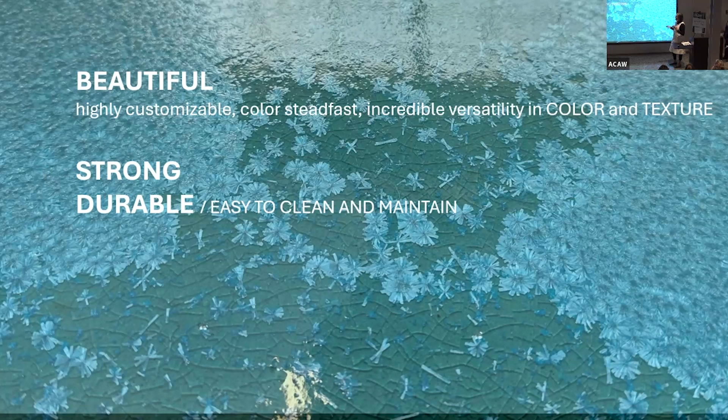One of the things that we loved about terracotta was that it offered us the ability to play with color, which is something that in our market is highly desirable, but that it's also strong and durable and easy to clean and maintain.

I want to pause about design and beauty for a second, because we were walking with Omar through this amazing tour, and we got to see the Guaranty Building.

We talked with Mick also about how long a building should last. In our experience, if we're trying to convince somebody to spend money on a facade that's out of the norm of what they normally do, if it's not concrete, stucco, steel and metals, which is commonly used, we really have to do something that they consider beautiful. And when it is beautiful, you can see that it does last because people take care of it. I thought this was a really beautiful quote: in the end, we conserve what we love.

The idea that you're going to just be economical about something, or functional or rational, without thinking about the beauty—I think sometimes designers feel uncomfortable with that word, but in fact it is what keeps people wanting to invest in your project and to use a material like terracotta, because they really just fall in love with it. We couldn't get enough of this building.

We have seen people fondle our terracotta. We ourselves can't stop touching it and looking at the glaze. We think there's a real human need for that in our built environment, aside from all the other important things that all of the teams have touched upon—this need for connection and beauty.

So I feel sorry for this generation, but we think our generation needs to be about the solutions. When I graduated, our region was hit by Hurricane Andrew, and what we witnessed after that was that our wind zones have gone through the charts. We started at about 120 miles per hour, and now we're at 150, 180 mile an hour winds. We're in what you would consider a high velocity wind zone.

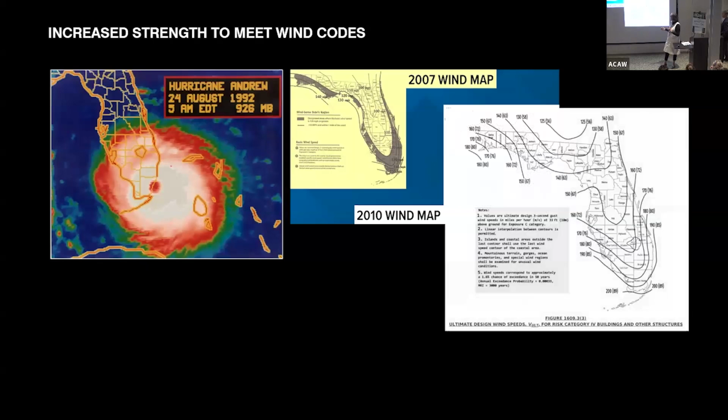And this is where we are right now: we only have maybe two tiles that we can specify that are concrete. What we're witnessing in the market is that facades are delaminating, so mortar beds are not holding up. We're getting what used to be 100-year, 500-year storms—that doesn't mean anything anymore. And when you couple it with wind, it's really an issue.

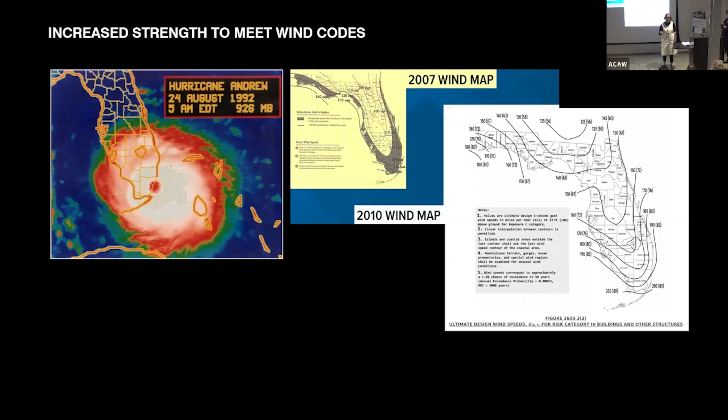It used to be that we would mud-set stone facades. Now we almost always mechanically fasten—it's now the code requirement that you mechanically fasten. So we were really pleased that Boston Valley Terra Cotta has a system that already has an NOA, because otherwise, if you have to tell a client 'I have this material you've really never used before, and you're going to have to engineer it and get it tested,' that becomes just another barrier to using it.

We talked about water. We feel like there's an open question about whether or not people should even build near the water, and I'm not going to get into that. All I'll say is my people have been in the region since the 1600s, in Cuba and that area. And if we cannot, with our ingenuity, our innovation, and our resources, come up with solutions, then what hope is there for the whole region? Not everyone has the resources to move.

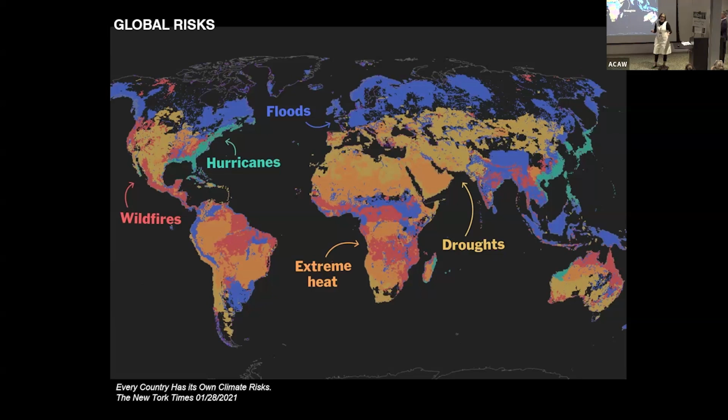If you look at that map I showed you—this little graphic the New York Times did—I think the whole world is under threat. Our little corner of the world has hurricanes, and we've got extreme heat everywhere, and flooding. But I think the world is going to start looking a lot more like Miami, where we have to deal with extreme heat, humidity, rain, and flooding. So we have to engage with that reality. And the other part of this water issue is that it's coming from the ground for us, because our ground is porous.

So in looking at historic buildings that were using terracotta and materials like that in the 20s, it's interesting to see that the reason the base of buildings were made of materials that could be easily wiped and cleaned is because when you have flooding, you don't want things to grow on that facade. You want to be able to clean them off and hose them off, because the stuff that comes with flooding is not nice—it's really a toxic brew and stew.

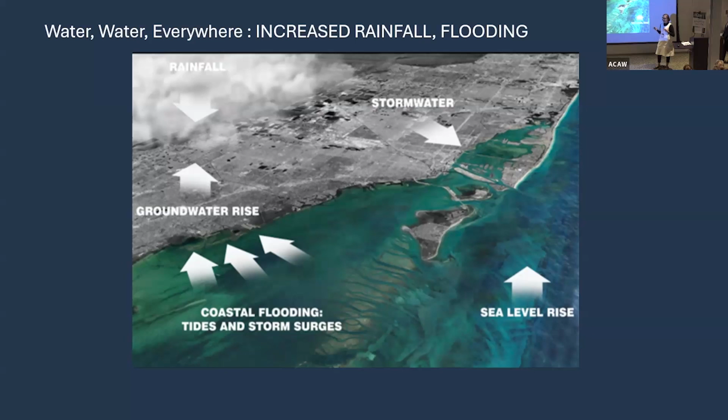So we're looking at materials. When we say durable, we don't just mean that they can stand with wind and extreme heat, but that if the water rises—and it will rise—what's left behind, we can clean it off and continue occupying these buildings. That's kind of the brief, and that's why we were interested in terracotta. We think it has a lot of the qualities that we need without the carbon.

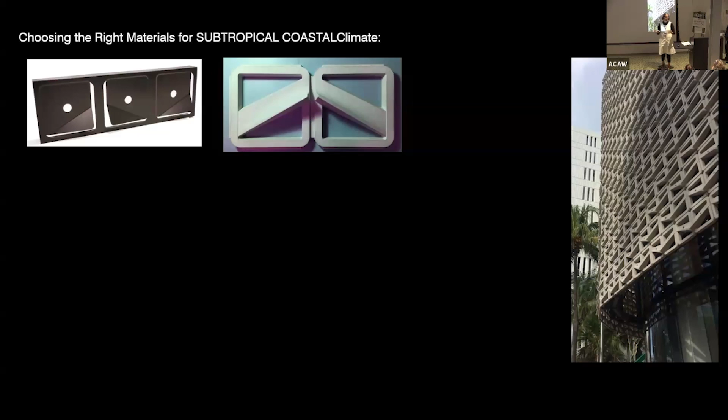This is an example of a project where we were playing around with fiber reinforced concrete. One reason we tried to get this client, in partnership with us, to change from a dark metal skin is that in our climate, keeping it light, as you guys have heard over and over again, is super important. Keeping it non-porous is also important. So this fiber reinforced concrete was interesting.

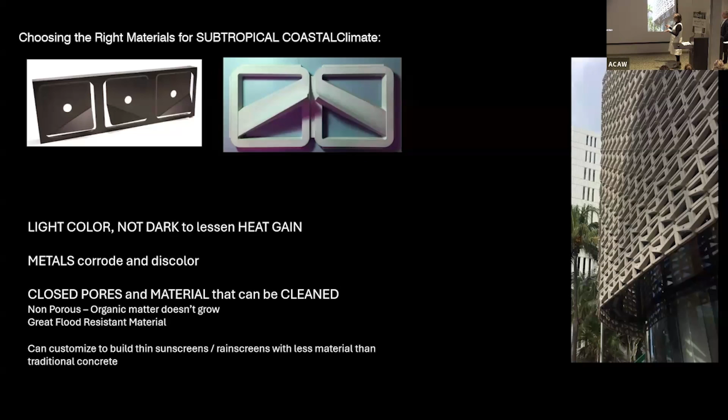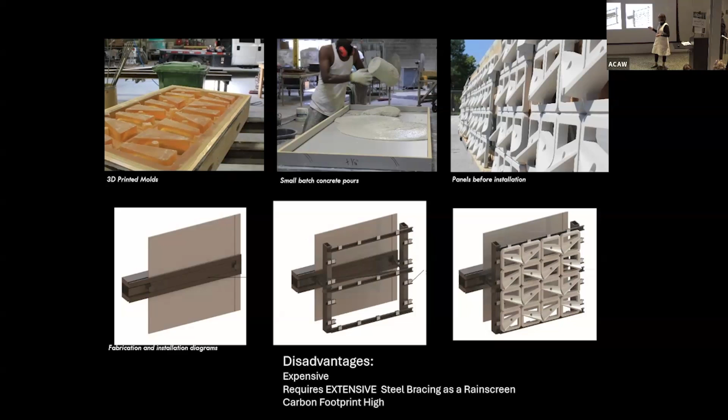We're finding that metals discolor a great deal. It's not great to have a lot of metal in our buildings in our region. This had a lot of positives, but the negative we found was that even though we were able to reduce the amount of material by using fiber reinforced concrete, what we ended up with, due to our wind codes, was a giant metal armature. So if we're being honest with each other, I don't need to do a life cycle analysis to know that's not necessarily a carbon-friendly situation.

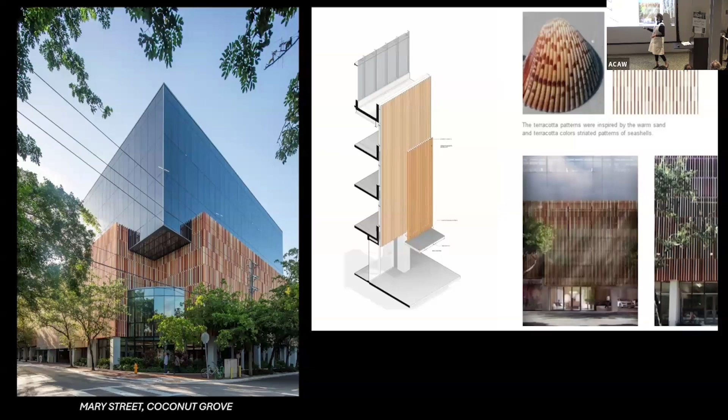It was a really good and instructive lesson for us. It was almost value-engineered out, but we managed to keep it by spacing it out, using less of the material, and using a consistent palette.

In this case, again, we were trying to always look at Florida-friendly or Florida-inspired materials. We were looking at seashells because there was a question of whether this would be embraced by the community—would they feel terracotta is an appropriate skin? We had a brick building in our foreground, and the name of the client was actually Terra, so we felt like terracotta was a good bet.

We were able to get it in, and it was well received, and it did install beautifully. They will not have to paint it, and it will not discolor. This isn't Boston Valley, but we didn't know you guys then—I apologize, but I wanted to show it. It did win awards, and it is on the cover this month of Florida Architecture magazine.

So I do think there is a possibility of using more of it, and we just have to figure out how to make it such that it doesn't get cut because of budget.

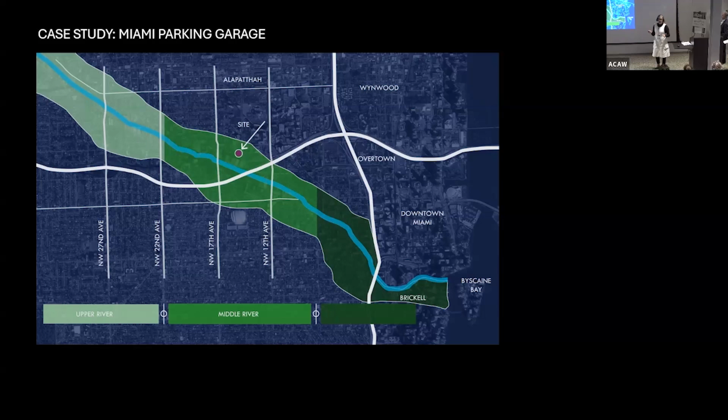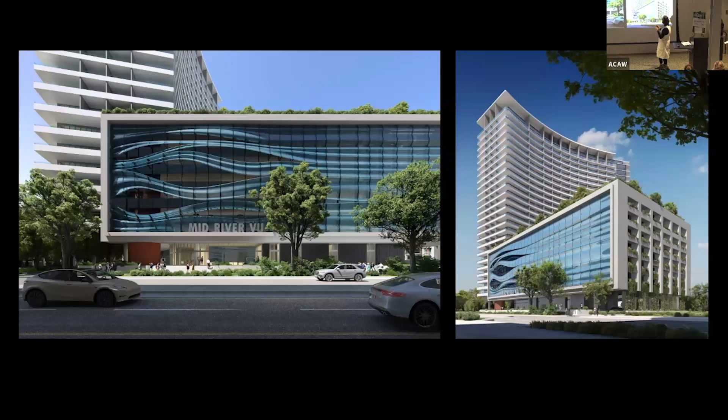So this project was the one we chose to study. It's again a parking garage structure on the river, and the inspiration for what we call the water wall—although we also workshopped 'blue wave,' but no, that has political meaning. There used to be a river in Miami with rapids, and that is no longer the case; it's gotten much more built up and so on. But there was this memory, and our site is on this river. So we designed a building that we presented to the city and have approval on.

One of the things about new buildings and new construction in Miami is that any new building has to take care of its water on site. I think the group from New Orleans talked about that. So when you have all this new construction next to lower density buildings, you have to take the water from the roofs, somehow deal with it, hold it, and release it slowly so you don't flood the properties next to you.

So the facade that we were looking at was this one, where we would take the runoff from the roof, slow it down, and then bring it into cisterns and into a rain garden at the base of it. This facade was in metal, but we're also now looking at it as possibly terracotta. For the purposes of the exercise, we were looking at this one.

We have one precedent where this was important, that we've seen that had done something like this, where they have the storm drains from the roof, but they also let the water slow down with these series of terraced planters. It was good to show a client something that exists in the world, even if it was an expo, because it suggests that it's a possibility. So this is one that we were looking at.

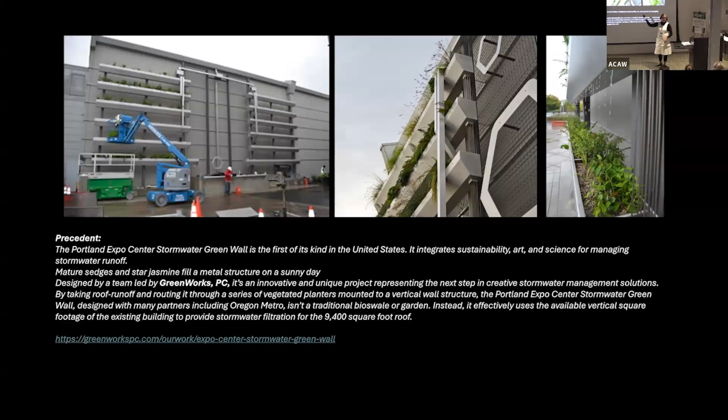If you think about all the terracotta facades that we've seen, even historically, they managed to take all of those elements and make them beautiful. Terracotta is a material that could handle each and every one of those components, from the scupper to the planter to everything really about it. But for our purposes of ACAW, we decided to just deal with the cladding.

And we had to kind of pick a spot because there were so many opportunities, like everyone in this challenge. So I'm going to let Carlos get into the evolution of it, but this is kind of what we settled on. Just to explain it quickly, this would be the base. If you extrapolate this up, here's a view through. That's a whole study of how much material we needed.

This is the original sketch that we presented. But the idea was that we were going to do the facing of the planter, and then...

So I just wanted to mention that there is so much water coming off of the tower roof, but it's also coming off of the vertical elevation towards the east, because these are very deep balconies for marketing. So the floor to floor is almost the width of those balconies, so those balconies are picking up huge amounts of water.

Before we were awarded ACAW, what we had been doing was bringing down all the water from the eastern facade of the tower and the roof, taking part of it into cisterns on the landscape deck to use for irrigation. We also had substantial planting on that roof to control the water coming into it, so all of these things become temporary holding basins for the water so that we're not flooding the street. The roof deck itself still was generating water.

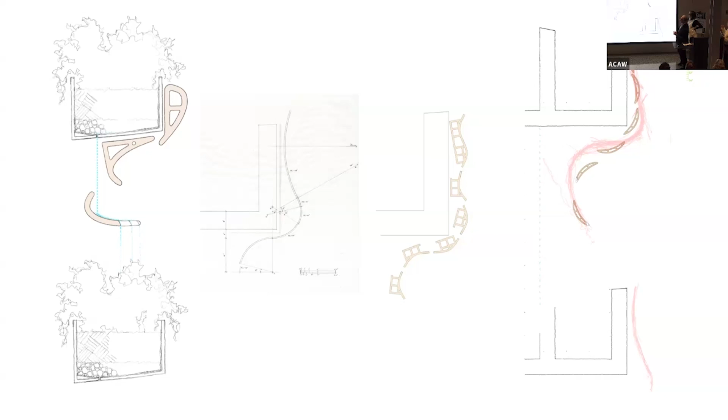And we went through a series of initial design tests. We really needed them to be curvilinear shapes, just aesthetically we thought it would work. But we knew really early on that all the shapes really had to be extruded to keep the cost down.

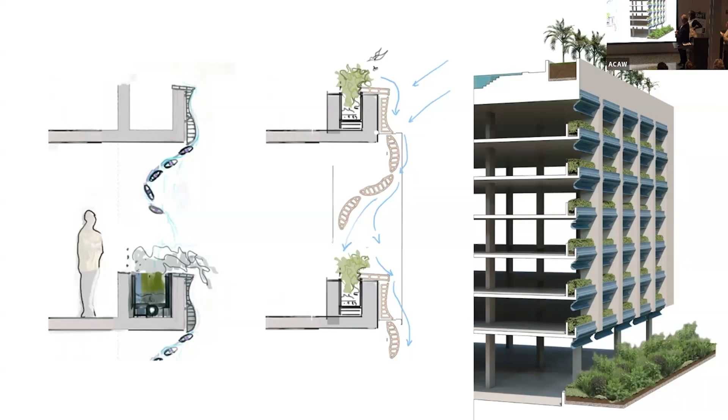And the final scheme, this is an early iteration of how we would be running it. This is starting, the one in the middle is starting to get closer to what we ended up planning for the building itself, which is two extruded shapes and then one cast piece for the top, which I think will end up also being an extruded shape.

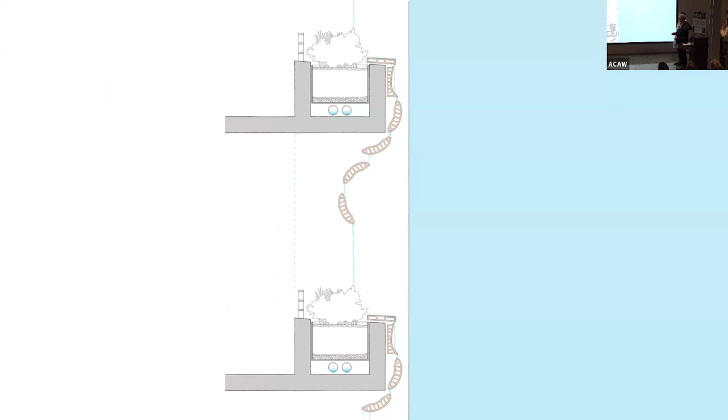And then I'm going to pass it on to you.

So once we started looking into the constraints of this project, we understood that we had a 10-foot bay, 8 to 10-foot bay structural grid to deal with, so our system would have to span that much. We would also be dealing with a system that would be collecting water and working on the retention of this water, and would have to sustain high wind loads, hurricanes.

So we are also looking into having some type of secondary retention framing system, so once the pieces break, they could be retained in place and not start flying around during a hurricane event. So we started looking into that, and it also needed to be a cost-efficient system and competitive to go through the project itself.

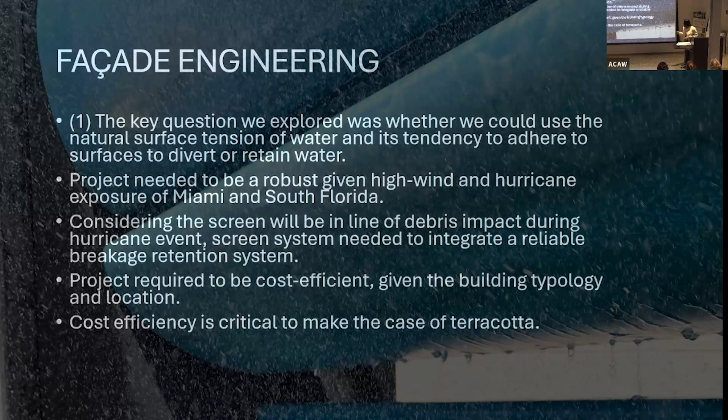So we knew immediately that pressing and slip cast was not an option for us because of cost. We had to explore extrusions. We also wanted to do repetitions, not only in every bay, but also within the bay. We wanted just one unique die. We wanted to explore extended attachments. They are already widely used in the industry. We didn't want anything custom because that would also add costs. And we wanted to also work with Boston Valley on the fabrication and then installation.

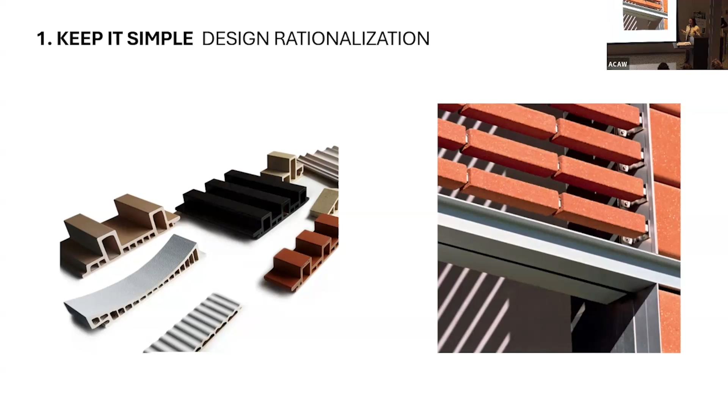So we did a few design intents, which we have discussed, and our third evaluation was actually what we went through. I'm going to walk you through all the processes we did.

The first extrusion, we thought, well, we extrude one piece, we divide them into two. We have two pieces to play with. We could deal with one side curvature. However, once looking at it from the inside, we were not meeting the design intent. So it looked flat. It didn't carry the movement Touzet was looking for. And also, we started to see that we could not manage the water flow on the inside.

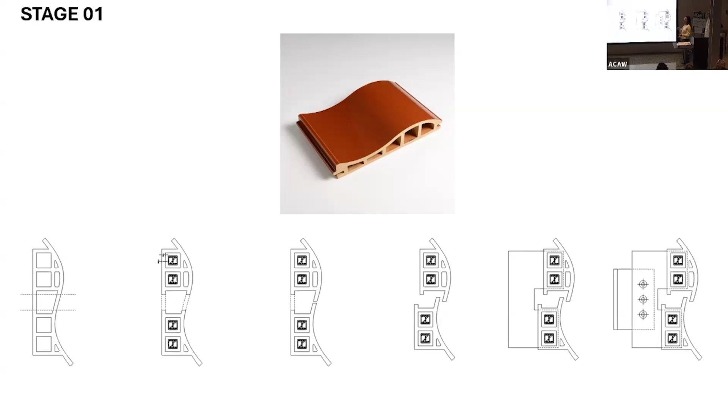So immediately we wanted to go into a system that could carry curvature on the inside and on the outside. And that was one of our iterations. We did see that having a channel was also not working well because you would accumulate water at the location.

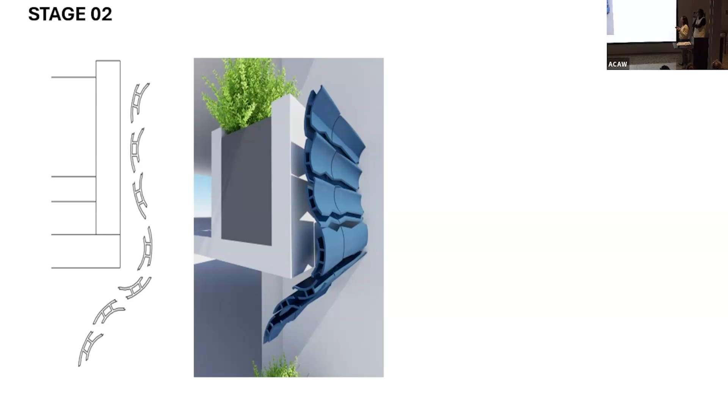So we did another iteration where we closed the extrusions, but we did want to span 10 feet. So that's where we had to add aluminum extrusions to it. And then we came back to the same problem of looking to the inside. If you look to the inside, you're going to see extrusions, not meeting the design intent again.

And with this scheme, we would have unique attachment points. And we also wanted something that would be sustainable. So adding metal was not an option for us.

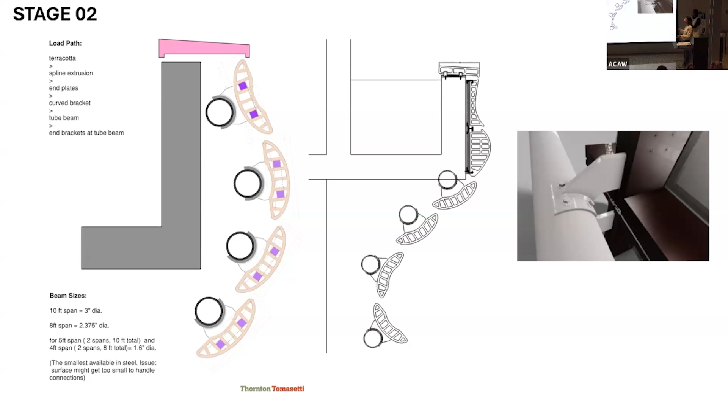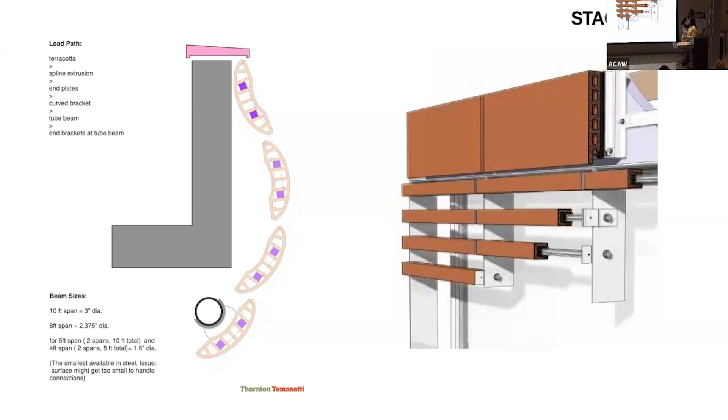So our last and final iteration was to add a supporting point at mid-span, which brought the system and the extrusion lengths to something typical that Boston Valley has done multiple times. So we'd be dealing with something that instead of spanning 10 feet, would now span 5 feet. And guess what? All the standard systems that they use for TerraClad would be sufficient and implemented and widely applicable. And we've seen multiple installations, easy to install, easy to fabricate, and beautiful.

So that's just to show the inspiration and how we got to our extrusion itself. We need to fine tune how we would have the inserts that would go and span the 4 feet, not the 5 feet anymore, or not the 10 feet anymore. We also had to modify the acute angles to just avoid stress concentrations, and we had to include a landing zone so it could be extruded in the plant.

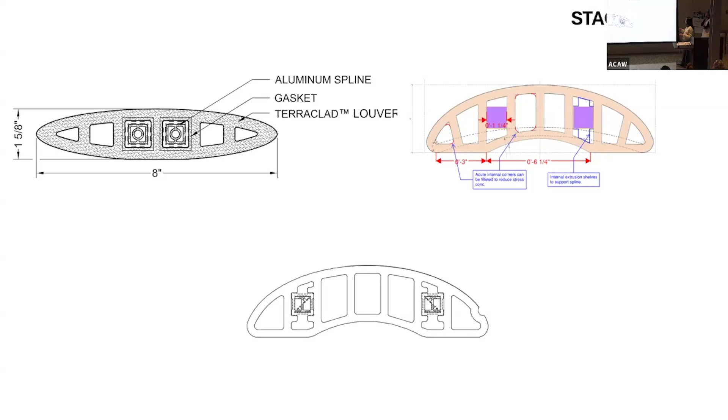Then finally, we had the big scale project design, but we had to shrink down to fit the mock-up, right? So our base went from 5 feet to 48 inches. If you looked at the design intent, we initially carried 3 extrusions, 4 extrusions, and then we modified to 3 extrusions. And then we also included a coping piece to give this movement.

The closer we got to using what the material can do, and Andy, thank you so much - where is he? The glaze was so much of what made it so beautiful for us, to see how the glaze reacted to the shapes, and to really use light and how we position these things in space creates the shadow play, and it accentuates what we wanted it to do.

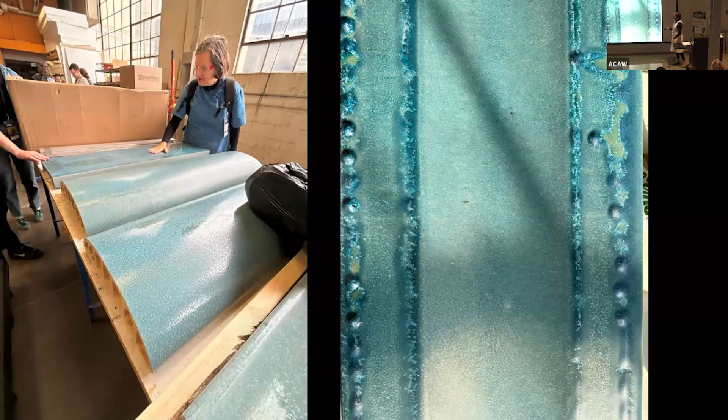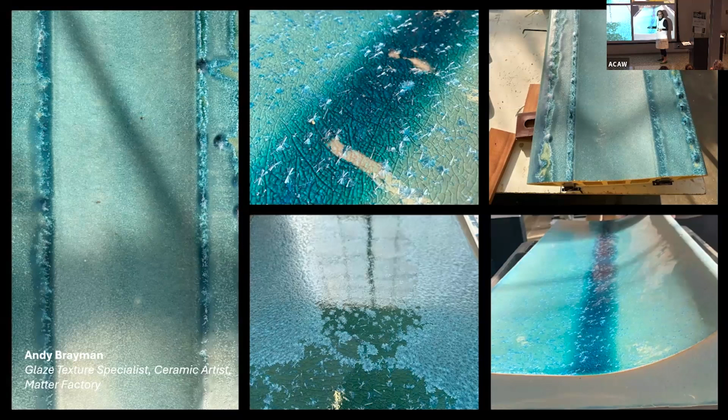From the get-go, we couldn't stop touching it. People kept coming over, and it is a delight. And architecture, as we said, is part of that. So there are just so many moments, and people would see all sorts of things in the glaze, micro, macros. So it's great.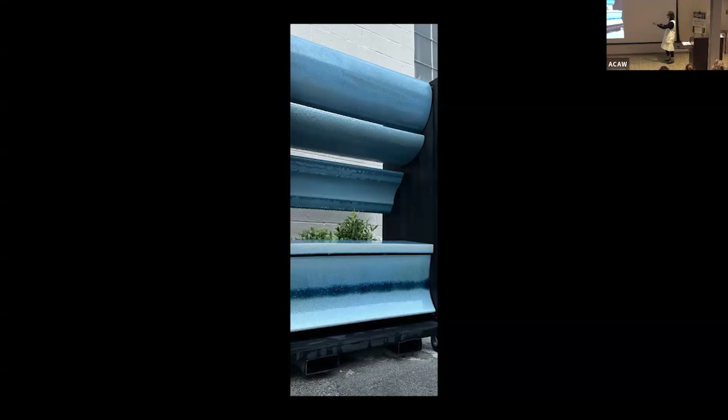And the little puddles and the rivulets that formed actually look like the little sea foam or the water froth that we were kind of looking for. And so this kind of accumulation of the glaze in the center, and those drops, they really look like rivulets. So it really kind of brought to life a concept that we had in our minds about a waterfall.

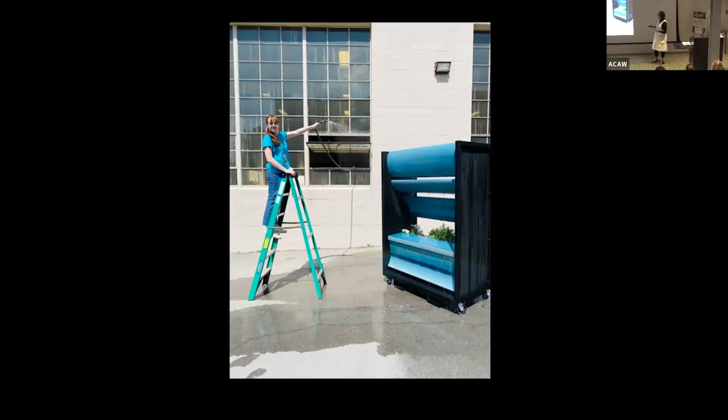So the ultimate test was to put water on it. And as soon as we took it outside, I want to say two bees came over. I think, and I'll say, the planter is in metal—it could obviously be terracotta. We just didn't go that far because that would have been another component, and we didn't want to.

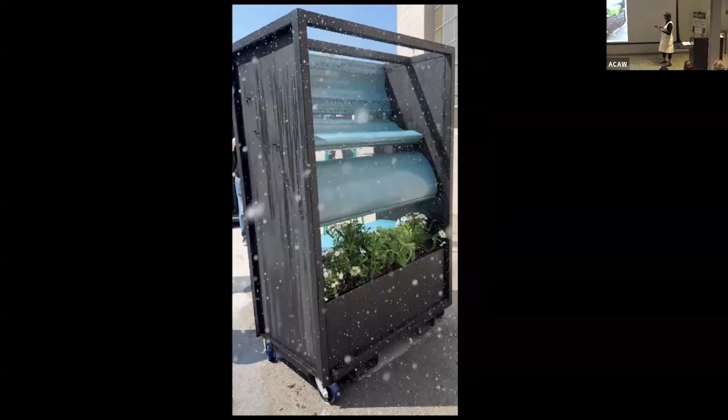How do I play it? Yeah, you can see how it plays. It's like a rain dance that happens. It was really quite beautiful to see it in the sunlight and to see it with the rain.

We're big believers in bringing biodiversity and pollinators back wherever we can. So we do a lot of green roofs, and we're big on vegetated facades. It was fun to add that component. Clearly that's a whole study, as you guys have seen with a lot of teams that have gone full into it.

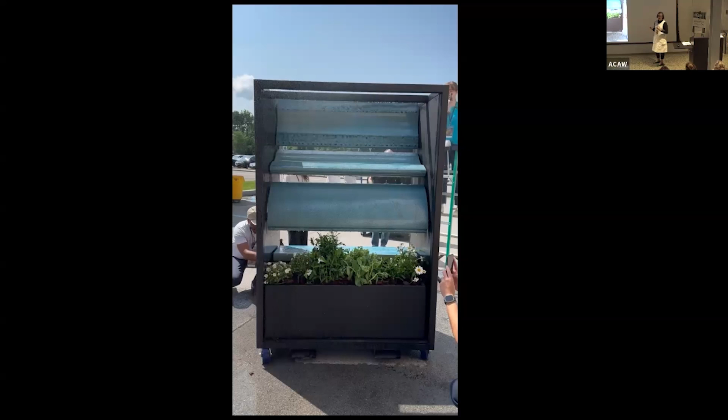We were just kind of playing with the angles to create the effect over the course of the facade, but there's a lot more study that can go into the precise angles. We did speak to our landscape architect consultant for the job as to how high the plants would want to have that dripping and how they would tolerate that. But there's a lot more study to be done for that life to be sustained. We think it's an important goal to try to bring it every time we can.

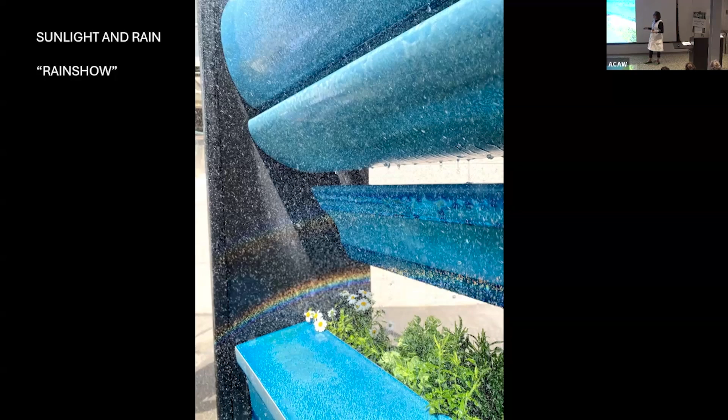So yeah, this little rainbow happens. It's just nature. That layer of light and rain and nature is what gives all of it life. We really wanted to do the most with the least, or as much as we could scale it up, and to study for ourselves with a lot of constraints what we could do. And because it is such an amazing material, we were super happy with how it turned out.

So what we learned from our perspective, what we wanted to learn about this—it's that saying from Picasso: learn the rules like a pro so you can break them like an artist. This is for us about learning the rules.

So we're kind of tweaking, how do we get to a place where we actually can present it to our client and say, we've got a really good alternative to metal or concrete, and we think you should consider it. I think we're very close to being there.

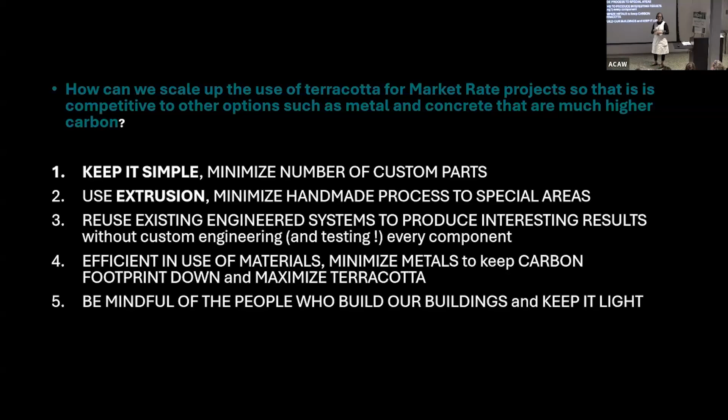We have another job we're looking at, extrusions, and I think because the market is getting more sophisticated and the budgets are big enough to absorb a better skin, in our region at least, we're starting to see that this is a material that needs to be reintroduced. Our job is to try to understand it well enough to make the case for it. So I hope that was informative to you guys. Thank you.

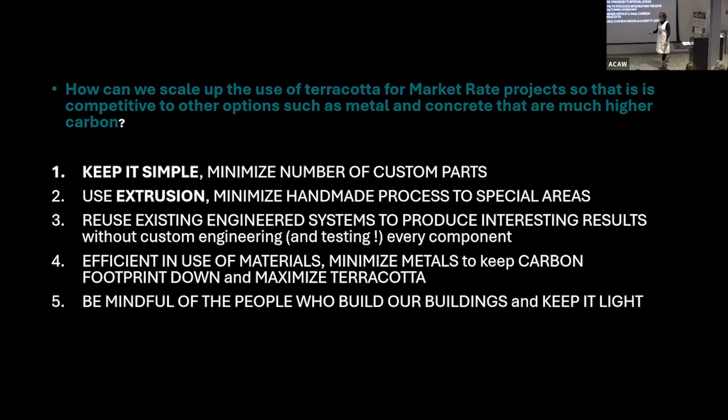Hi, thank you for this presentation, it was amazing. As you said, the minute I laid eyes on it I just wanted to touch it. But I have a question regarding acoustics—thinking about it as a whole facade within a parking lot, did you think about the acoustics when looking at the form? Because I'm sure it's going to be louder, probably.

That's a really good question. We thought about it, and when we get rain it's like a thunderous rain, but it's usually a short, brief rain and then it goes away. So no, but I think that's an interesting question. We work in a studio where we get rained on, in the heart of Little Havana, and when it happens it's kind of like, yeah, it's raining—but here it's a thundering rain. People usually pass through a parking garage, so it's not occupational, like you'd be annoyed by it because you're sitting there for a long time. But I don't know, we thought it would be cool if it did.

One question - I wanted to mention that actually the terracotta pieces in the real garage would be much further apart than this. And the other wall, the main wall, is I think a ratio of probably 3 times the width of this elevation.